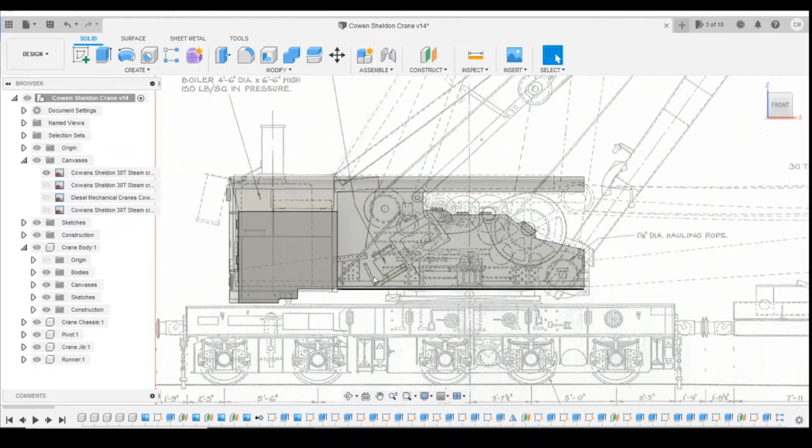What we do have, which might be of some use, is the top-down plan. We'll be able to see things like here - the large pulley gear wheel, the gearbox, and I think this is the drivetrain coming up here. This possibly is the toolbox, so we could use that as a guide to where that would be.

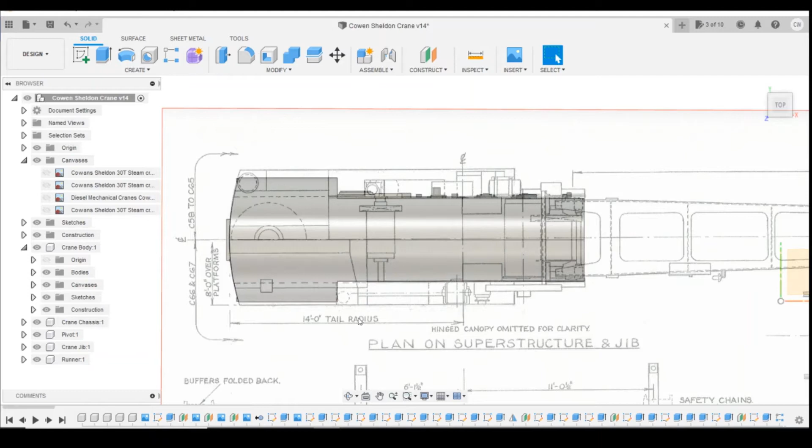We've also got on the side here a grille to draw, and there's a window, and looking at the pictures, there's a little V shape here. What I believe is under here is a window, so when the jib lifts up, this lifts with the jib, and the operator can see out to the top of the crane. I'm not sure we're going to model the window in, because on the model you've only got this tiny gap to see through. I may put it in, but we'll see how we go.

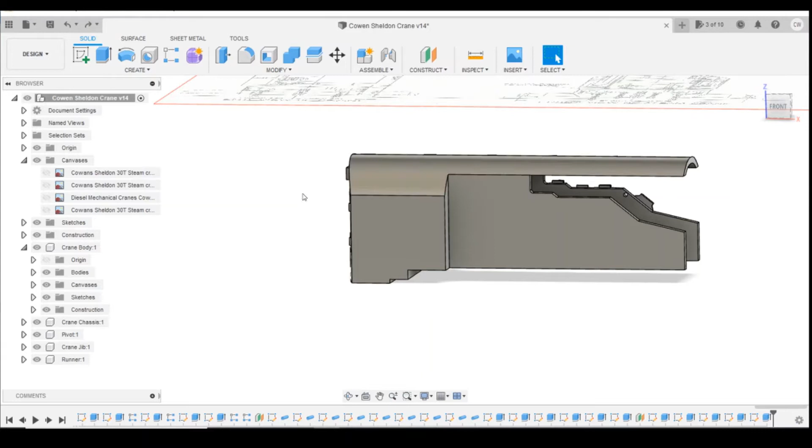Jumping back into Fusion, first we'll make sure we've got the crane body radio button checked, using the sketch history within that folder. We'll create a sketch on this face, and draw a rectangle for that grille.

Sort of that size - if we look at the photograph, slightly down, probably 3 or 4 inches down from the roof, similar sort of position up from where the back door height would be, about 6 inches in, and it goes about halfway in that first step of the weight.

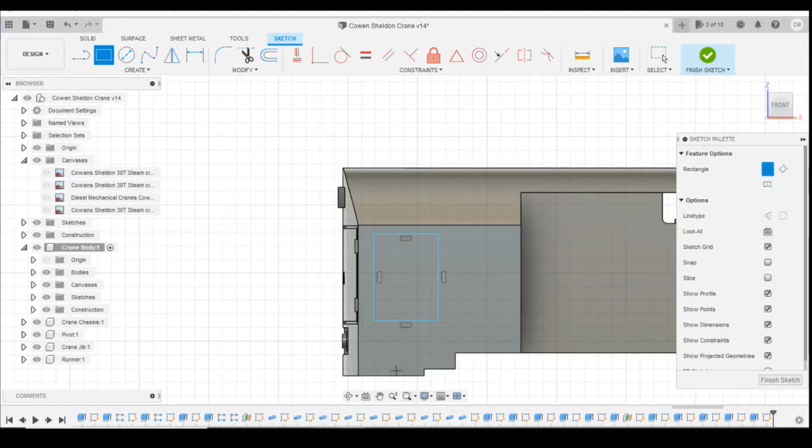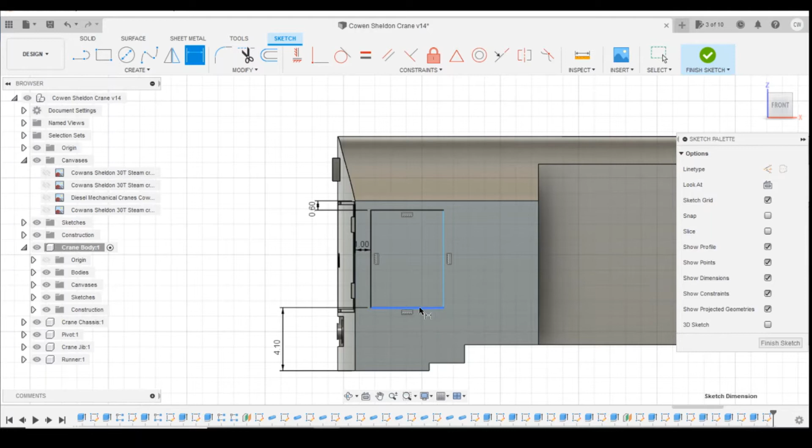So we'll define this position - 0.6, and we'll do 1 millimeter from the side there to give us that 6 inches. Similar height to the door here, so maybe needs to come down a tiny bit, 4.1. The distance across, halfway along, looks okay, so let's round that to 4.6 just to make it even.

We'll extrude this out slightly to give us that detailed edge there. Good. We'll do this grille in a similar fashion to the way we did this one on the end here. So we'll create...

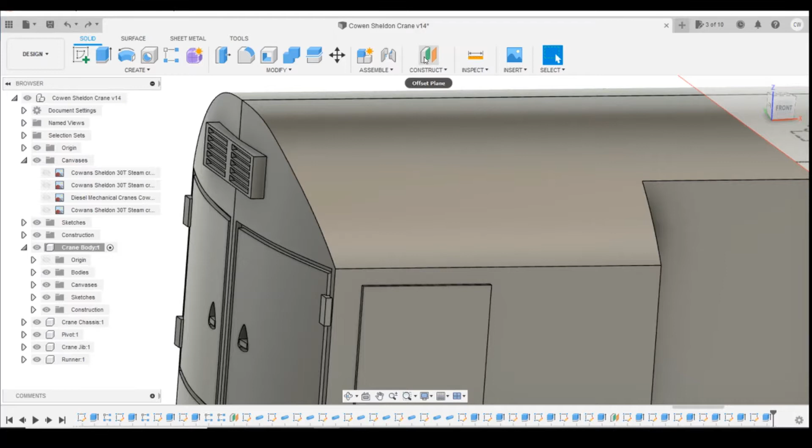I don't know what's happened there, let's undo something. That's it. We'll do an offset plane on that face there.

Let's have a look at the picture - how far in do they start? A couple of inches, so let's go 0.4.

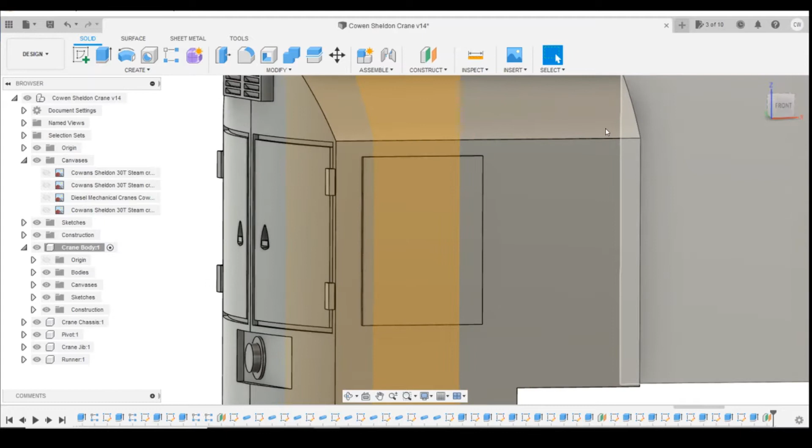We'll create a sketch on that face, starting by drawing a line inwards, coming in 0.3 millimeters, same as we did on the grille over there. Constrain it - wait, let's define the height down first before we constrain that. Do 0.3, and then we'll constrain that to the face so it doesn't jump upwards.

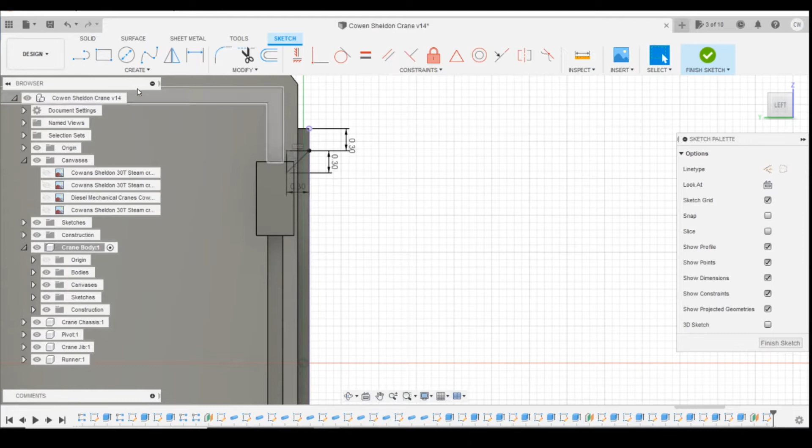That's it. Then we'll come down 0.3 and draw the triangle, closing that. Now we should be able to select that profile like that, and if we rotate that round, we can then extrude that across.

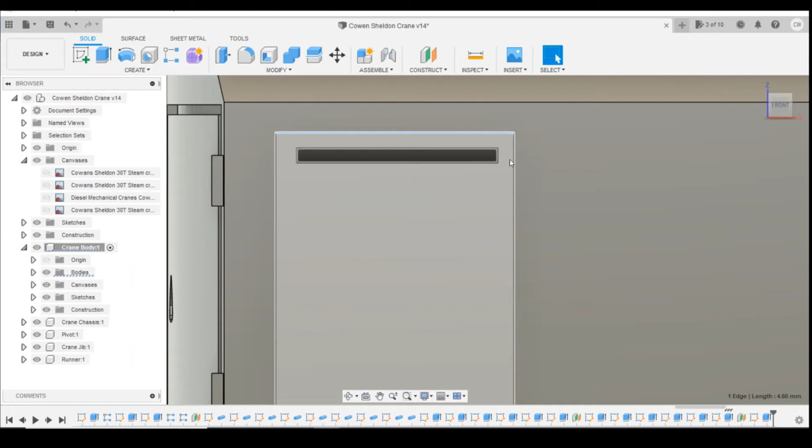Let's just check our measurements here. So we've got 4.6, that was 0.4 in, so that should be 3.8 extrusion. So that's 3.9, so just change that to 3.8. And now we know we've got the same distance both sides.

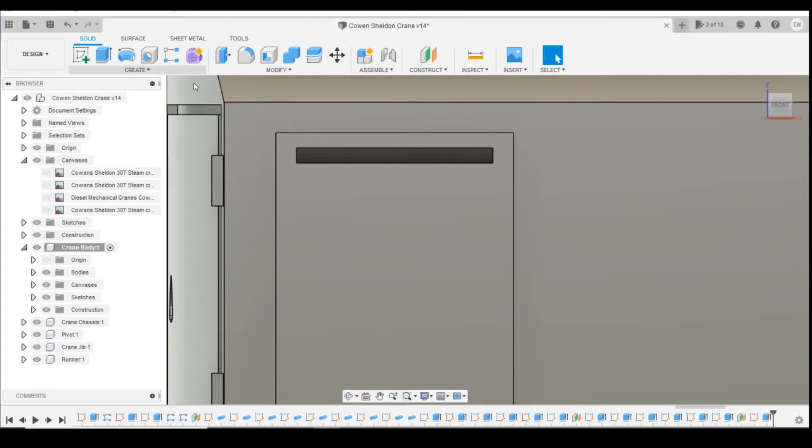Okay, so now what we'll do is we'll just copy that down in a pattern format, same as we did previous ones. So let's just rotate it so we can see what we're looking at, and we'll turn this canvas off so it's out of the way.

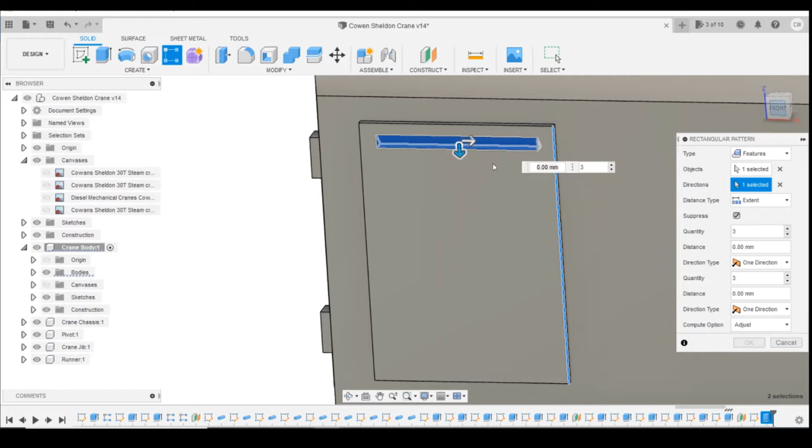Pattern, rectangular pattern, take that feature there. Direction is going to be coming downwards, and drag this down to the bottom.

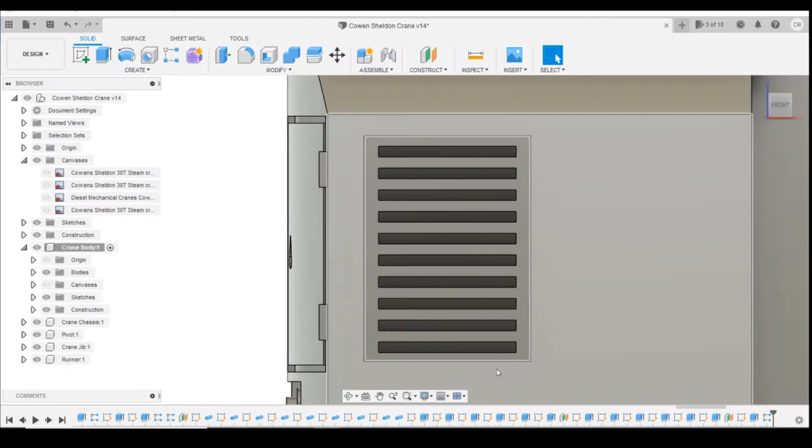And then we can start adding in a number of features so it looks about what we're after. Okay, so we've got 1, 2, 3, 4, 5, 6, 7, 8, 9, 10. Let's have a look, 1 through 12. So just add a couple more in there just to make them a little bit closer. We might not get too, or it might be too close. We'll have a look. Actually, looks okay.

Yeah, so there's our grille for the rear there. Nice and easy to do that one.

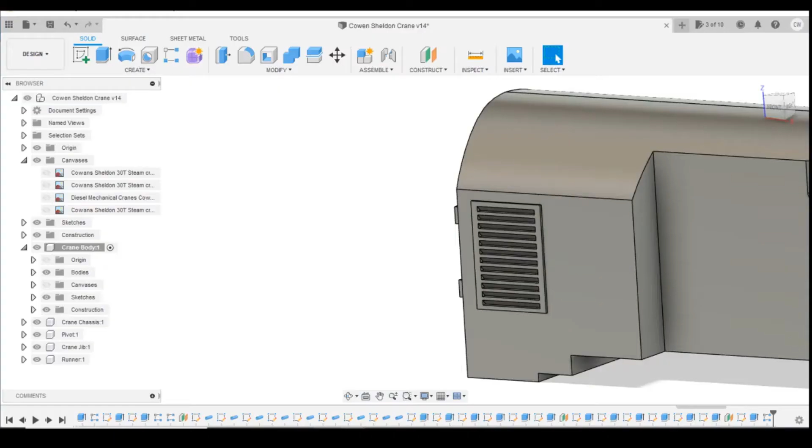Okay, the next thing we can notice is the roof actually extends here further than we've got on our drawing. Now we did notice that on the plan when we had it - if we turn this plan back on, it does look like it comes forward here as well. So what we'll do is we'll go in and fix that now. Let's turn that plan back on - that's the body. Turn the canvas back off.

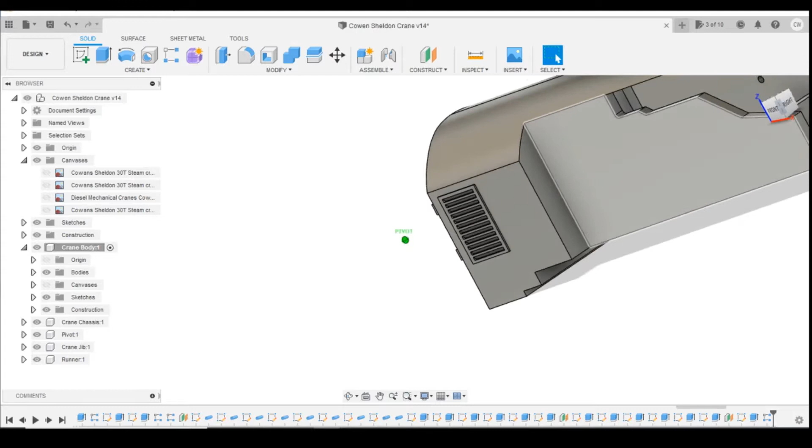So what we'll do is we'll just go and draw a profile on this face here, and then we can extrude that out slightly. So if we create a sketch here, what we're going to do is say that we want 0.8 millimeters, and actually what we could do is offset. Cancel that, try again - offset, turn the chain selection off, that radius there in 0.8 millimeters.

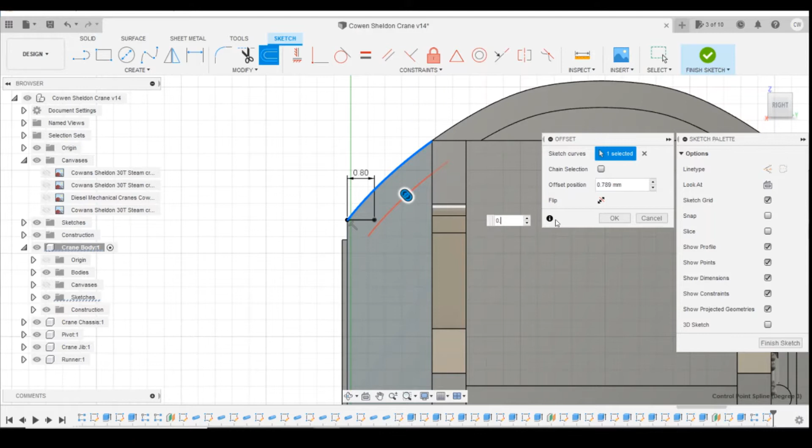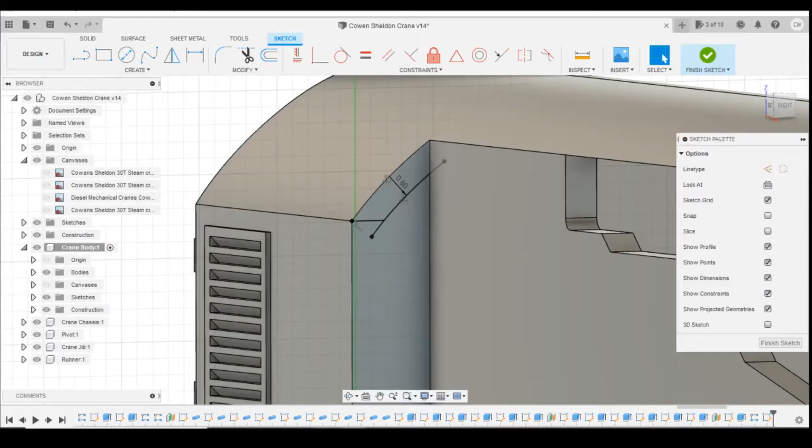Okay, so if we delete this line here, what we can do is constrain that line to that one there. That then gives us the profile, and if we look at the picture, it does look like it doesn't extend to the body, so that gives us the profile there that we can extrude outwards.

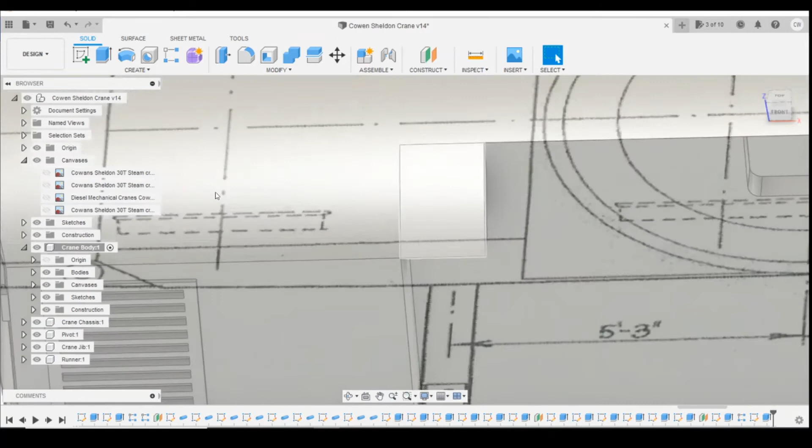If we rotate to the top, turn that canvas back on, you can see it extends to about there. Canvas back off so we can see what we've got. There you go. And we'll make sure that's actually joined - it has, yeah. Okay, so we've got that same profile, just extended slightly.

What we can then do is, we know that looking at this, the window sits underneath that panel there. So we can draw that window in. It comes down from pretty much where the roof line is, down to slightly above this bottom vent here by the looks of it.

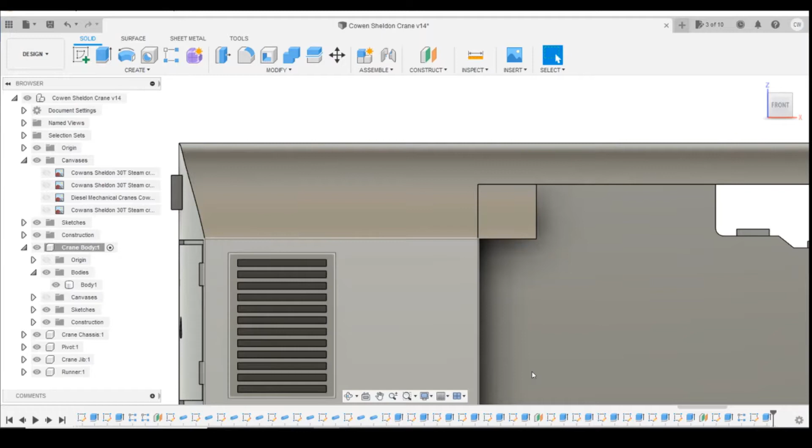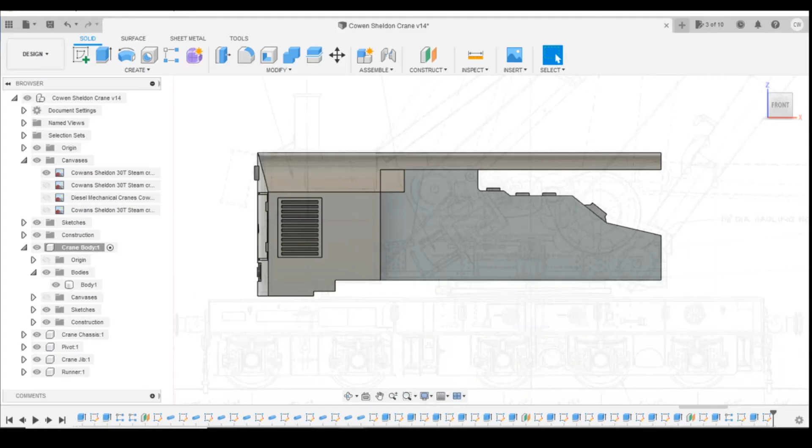So if we create a sketch on that face, what we will also do is check with that sketch roughly whereabouts the window would finish. Yeah, you can see it's roughly where that fire extinguisher is. Maybe it starts slightly behind this post, finishes slightly in front - there's the mounting point. So yeah, we're in the right area here.

So we can edit that sketch, draw a rectangle - that's a line, sorry, draw a rectangle. We can dimension it. Oh, actually before we dimension it, let's delete that. Before we dimension it, does it have a round window, round corners? Yes, it does.

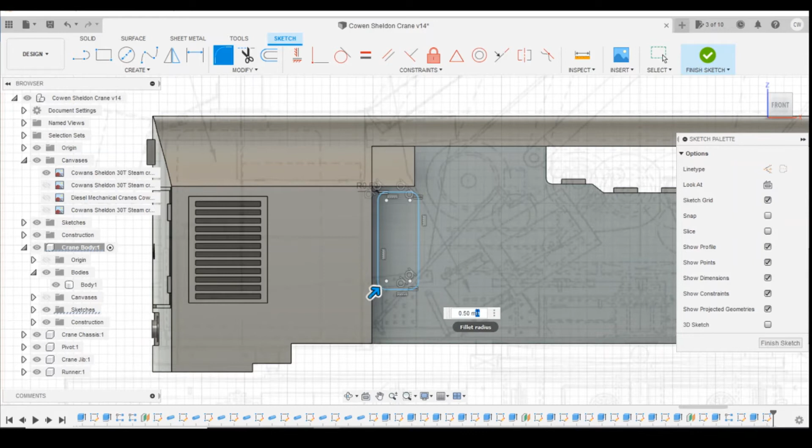So we can draw those in, holding shift while we do that to make sure we get them all, and we'll just round those in 0.5mm. How's that look? Probably a little bit too much. Let's go 0.7. See how it's changing the width here.

So what we can do there is define that width - that's 2.5. Position from there to there. We need it to move over slightly because that's pulled it back in. So we'll go 0.9mm, see what that does. Yeah. And then the height of this, 4.1.

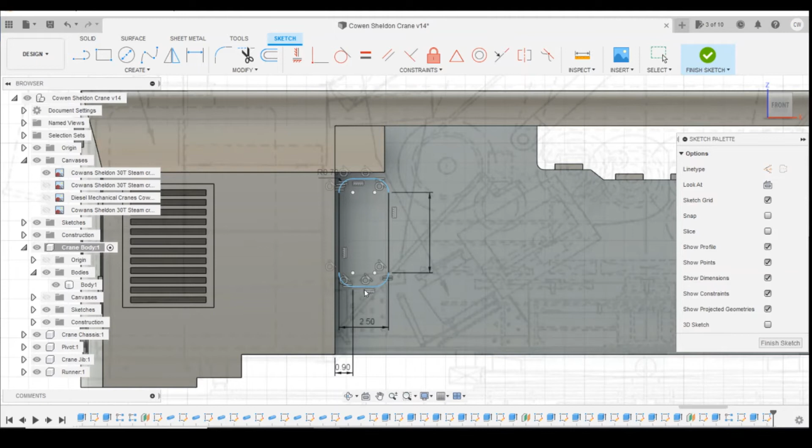And then the height from the base, 3.5. So how does that window aperture look and compare to the picture?

Possibly it needs to be a little bit wider. So if we go to 3mm wide, yeah, I think maybe that looks okay.

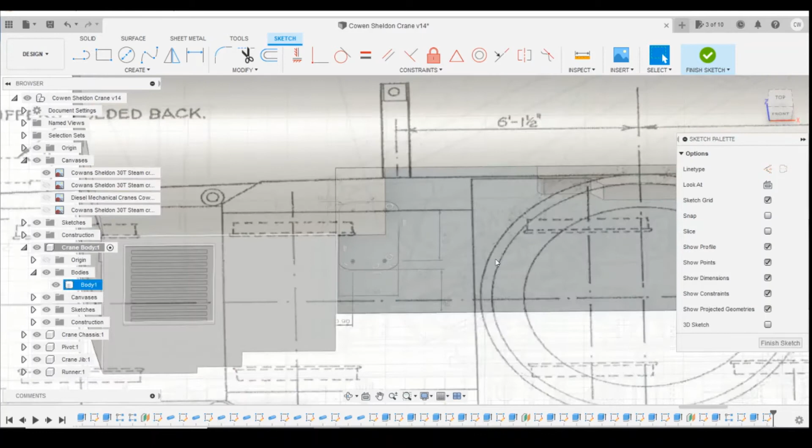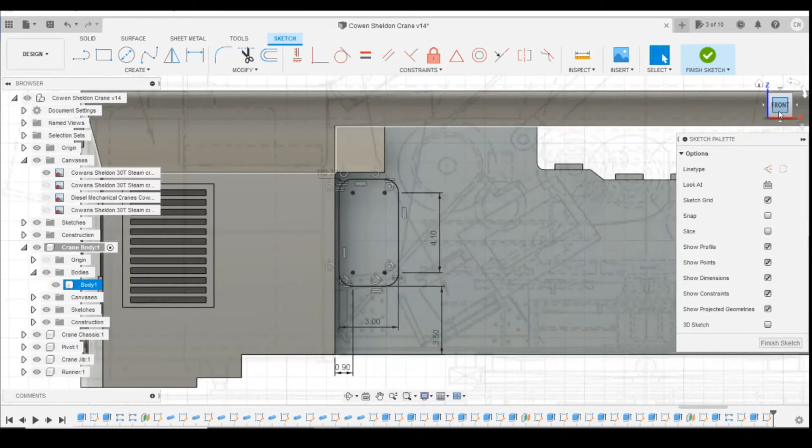If we rotate to the top - where's the toolbox? There's the toolbox, or what we think is the toolbox here. Yeah, I think we're in the ballpark there. It's very difficult when you don't have that scale plan there to get that right, but yeah, I think we're in the ballpark. So let's turn that canvas off and we'll extrude that through to the face internally.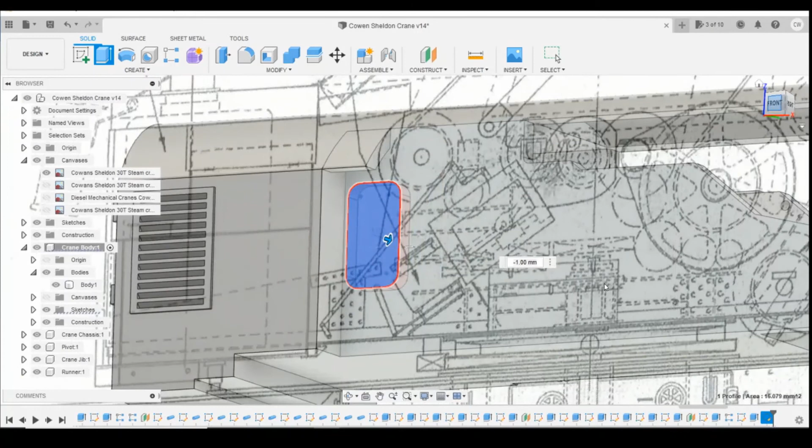Yeah, let's come all the way through. Turn this canvas off so he's not looking at that. And what we want now is to put a rubber seal on the outside, like a beading. So we can just go into that sketch, do an offset, turn that chain tangent back on, do an offset outwards slightly. It's only a tiny little beading, so we'll just go minus 0.2mm, I think.

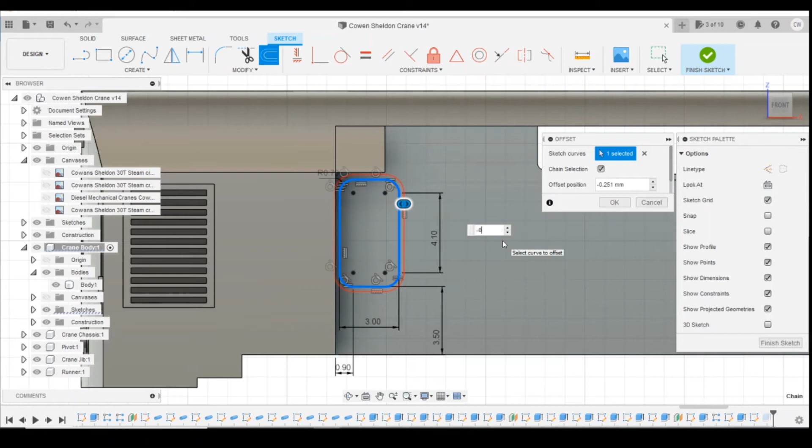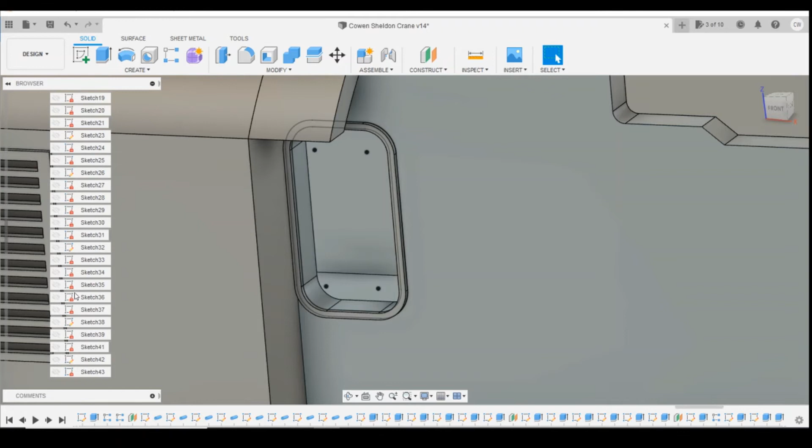And then we can extrude this forwards by 0.15 just to give us an edge there. Now, these dots here are showing because the sketch is still turned on. So if we come into the sketch, scroll down to the bottom, we can just turn it off and they'll disappear for us. And then we can minimise that.

Okay, so we've got our window, we've got that grill added in, and we've added this extra extension onto the roof there. Before we can go any further, we've got this running plate here that comes along here, so we're going to have to add that on. Might be worth checking whether there's one on the other side we need to add as well. So we'll start by adding that running plate on there next.

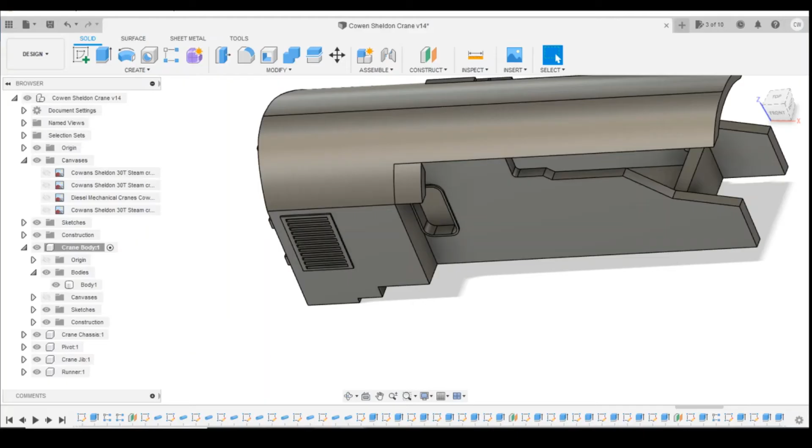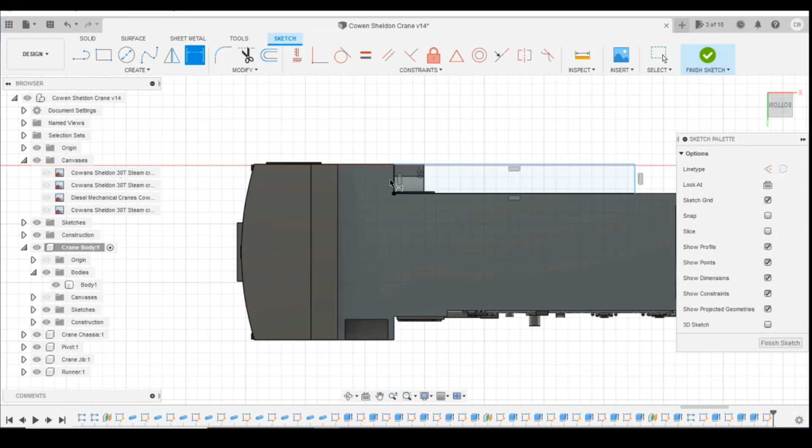Okay, so it's nice and simple. What we're going to do is create a sketch on this bottom surface here, and that puts it level with the bottom here. We can then just draw a 2-point rectangle, selecting that corner point, dragging it out to that one so we know the width is 2.5. Place it. We define what we've got so far, so we know that's 2.5. Okay, and we'll define that length. I don't know what it should be at the moment until I rotate it around and see where it comes to. So we'll extrude it upwards.

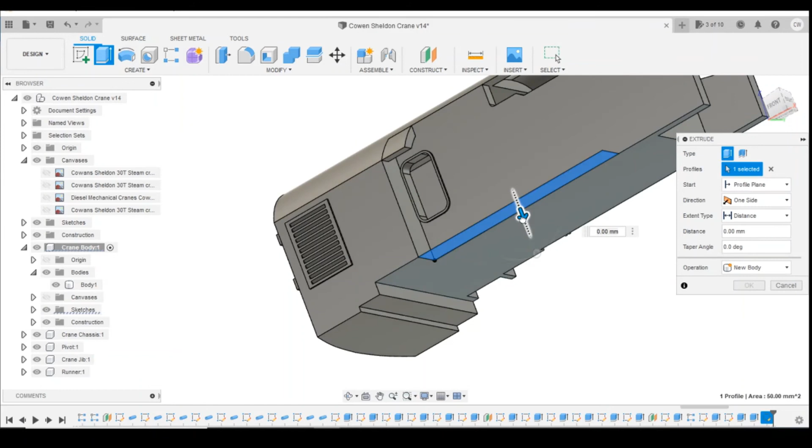Don't want to select that. Try again, select that profile. Just come up, and we're just going to have it 0.5mm thick. Okay, so let's have a look, see where its position should be on the plan.

Let's try that to start with. So there it goes. It needs to be a little bit longer. Okay, so we can come into this sketch here while we're still looking at that plan. Edit the sketch. Let's try 21. Does that move it close enough? Yes, it does. So now we've got that to the correct position on there.

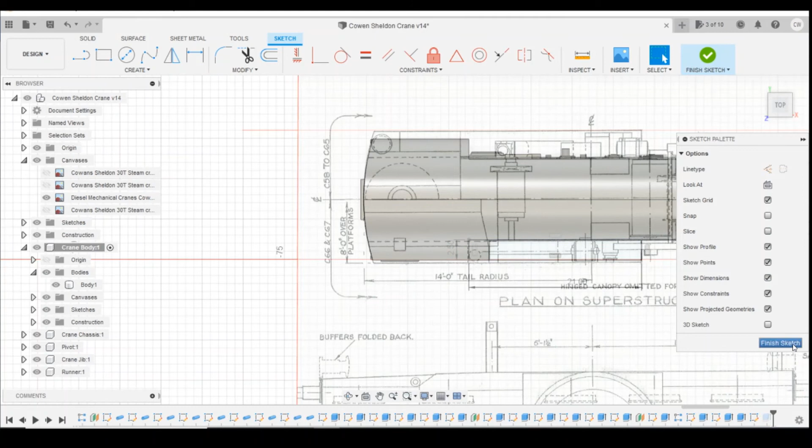Let's turn that sketch off. And we'll turn that one off. We'll save that at that point there. So jumping into the plan for the other side, it does actually look like there is a running plate there as well. It's the same sort of size.

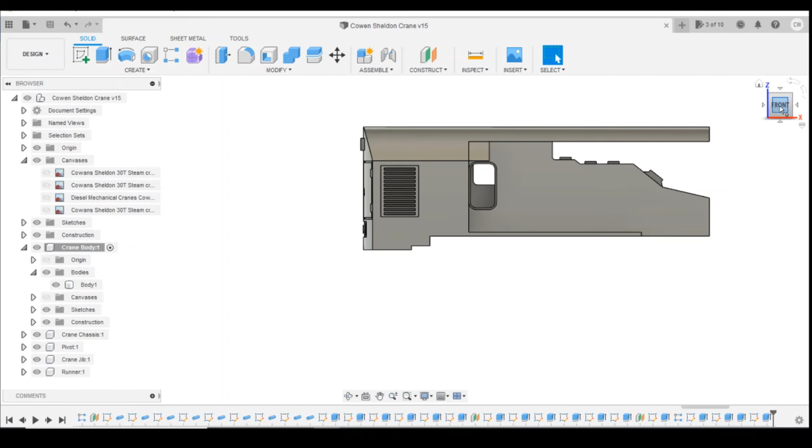So if we come back into Fusion, if we rotate this back across, what we'll do is create a sketch again on the bottom surface, and we'll just fill that in. So we'll use that 2-point rectangle, start in that corner, come into the plate, and we want it to have the same length as that one there. So it's 2.5 by 21. Just make sure that's defining. Yes, that's blue, yep. And we can extrude this.

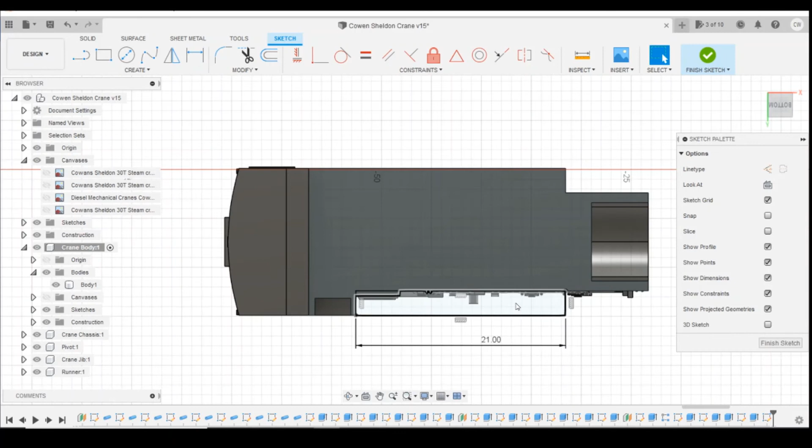Let's rotate it. Hopefully we won't lose any of the details that we've drawn on the bottom here. So minus 0.5. Yeah, we will. Okay, so this is going to be a little bit of a compromise that we might just have to bite here.

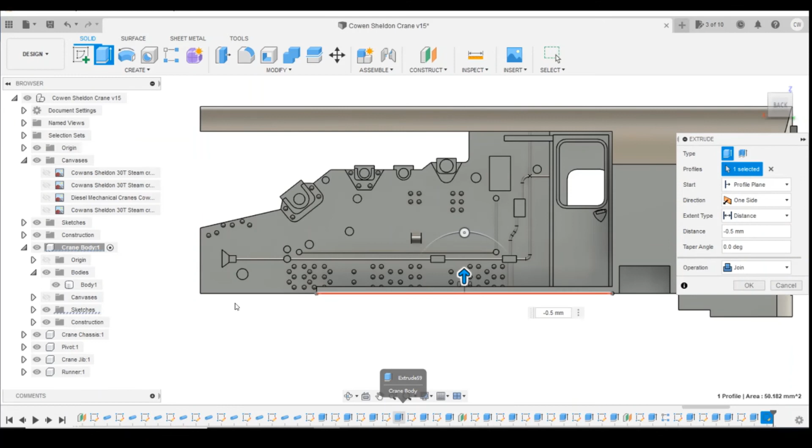Because that plate, what we could do is we could actually extrude that plate down on the other side and just bring the body down slightly. Let's have a look at the sketches if we can. That one. Yeah, we could maybe get away with bringing that downwards on both of these. Let's edit these features and we'll go plus 0.5 millimeter on both of these.

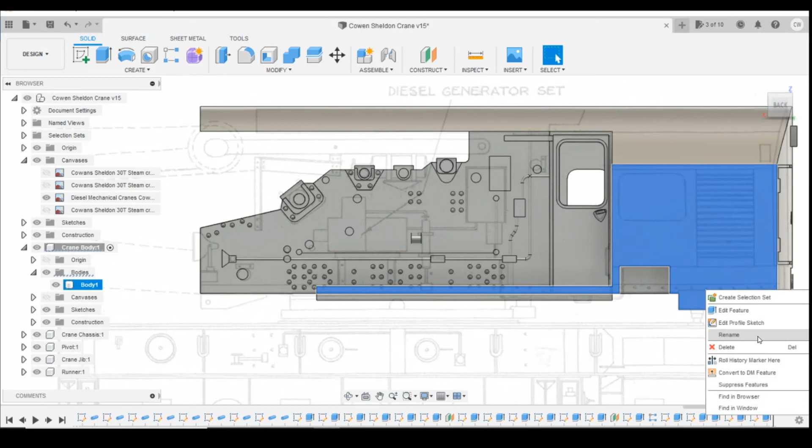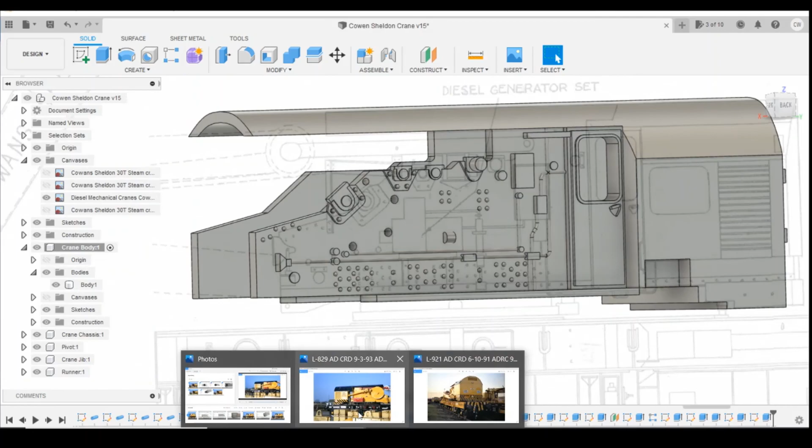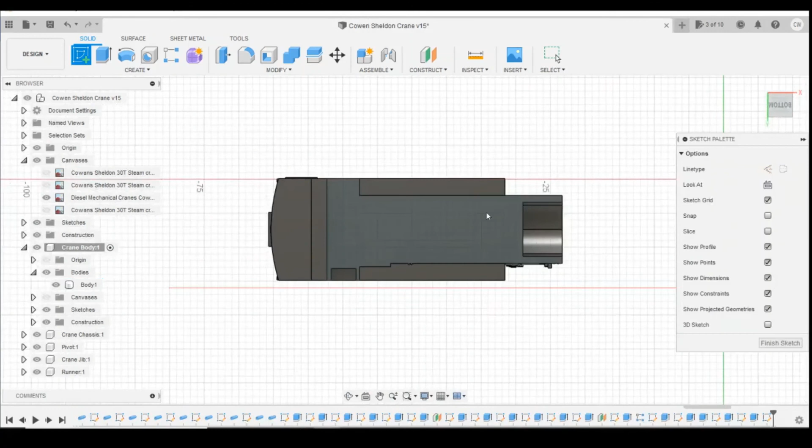Okay, so how do we get round? Do we need to? Do we need to bring the rest down? I think we need to do something in the middle here to join them, otherwise they're not going to print. So let's create a sketch on this inside surface. Just do a rectangle, go from that corner to that corner and extrude this to the same height as those ones to join.

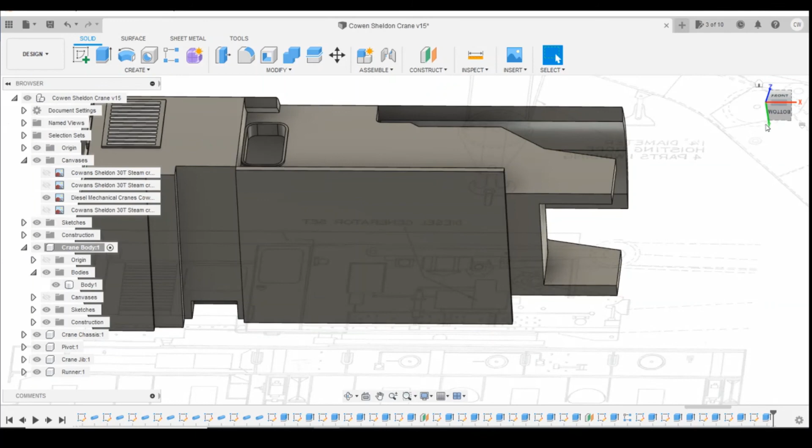And I'll check to make sure, yes, only one body. And I'm going to extrude this surface now. All the way across.

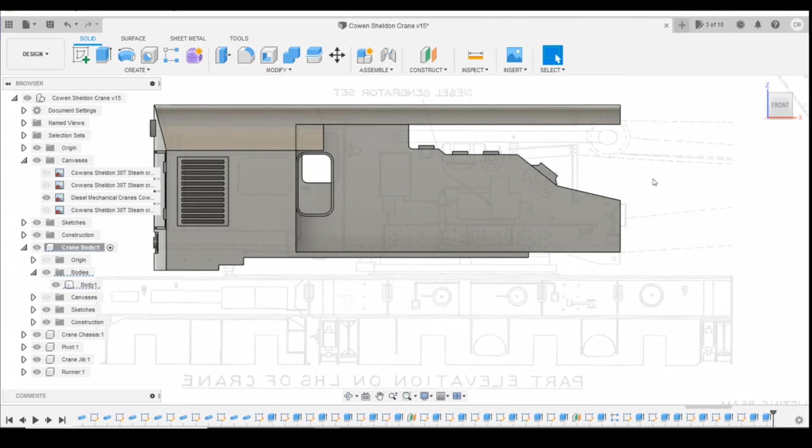Okay, so there you can see one of the limitations there of wanting to print something. You've got to take, especially in smaller scales, you can't really go to the thickness you'd want on this. You'd probably only want to come up maybe with 0.1, 0.2, but that wouldn't give you thick enough and it wouldn't print. So we are having to take a little bit of a compromise there, but I don't think you're really going to notice that too much once we get the model finished.

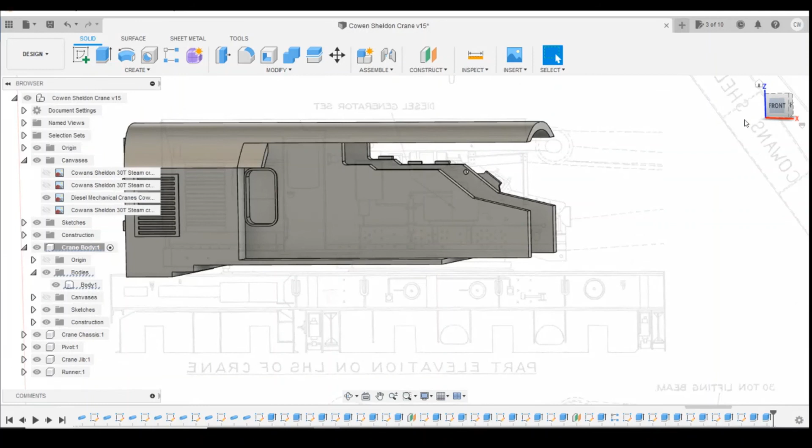Okay, I'm going to call that it for this lesson, and we'll come back to this on the next lesson. We'll start on the next lesson drawing this toolbox and whatever the cylinder was on the end here, and maybe start on the large pulley wheel over here as well. But yeah, that's going to be it for today.